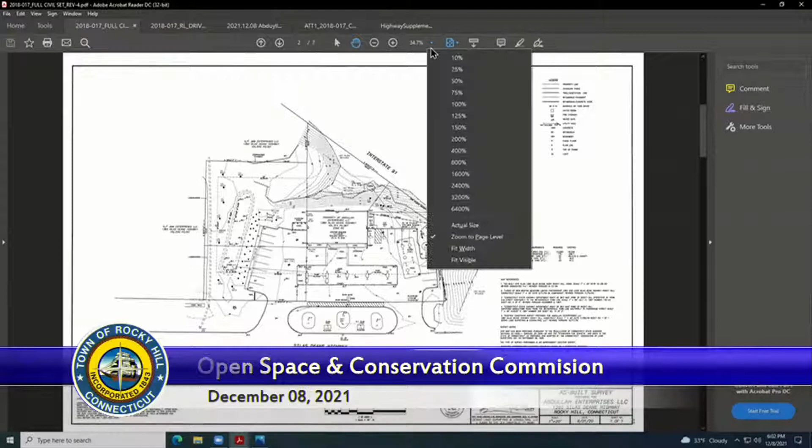Here's the existing conditions, how things currently are out there. You've got your filling station, which was recently renovated. This is the canopy, this is the convenience store. The underground tanks are right here.

As part of the prior project, we did some low impact development stormwater work in this area, so the drainage sheet flows off, goes through a vegetated strip, and goes to our detention-retention basin. On the south side of the property, the stormwater is handled by a stormwater treatment unit, and it is discharged to a plunge pool in the wetlands. You can see here there's a steep slope behind the building currently.

When I pull up the proposed plan, you'll see that the drive-through lane will enter here. We'll be relocating one parking space over to here. So the drive-through will enter here, we have a nice tight radius on it, functional but tight, that lets us bring the drive-through lane right against the building, and then we're able to exit through here.

When we get to the impacts and mitigation, one of the things you'll be seeing is this plunge pool is going to be restored back to wetlands and pulled back underneath the proposed drive-through lane. We're also going to be installing some additional stormwater management, we're calling it a stormwater quality wetlands. Let me just call up that proposed plan.

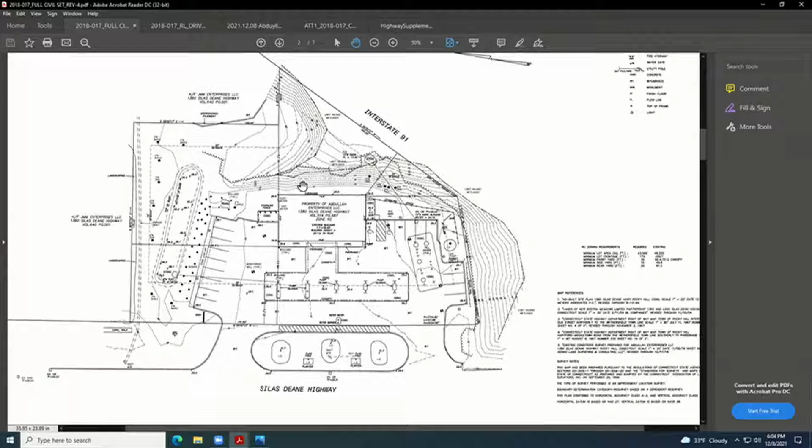Okay, so this is the proposed plan. Like I mentioned, this is where the drive-through enters. We're planning on making it a concrete surface, lighter colored, hopefully generate a little less heat into the wetlands. In order to create that drive-through lane, we're going to have a portion of retaining wall here. There was a comment last time about showing some sections through there, which we did, I'll show those in a little bit.

This portion of the drive-through lane will be underlain by some large culverts, in the dashed area here. The reason we're doing that, they're big open-ended culverts, the open ends face the wetlands, and that lets the water come in and out of them and lets us retain our flood storage, which we need to do.

As I mentioned, this is where we're installing that stormwater quality wetlands. We found that the soils over here are very tight, they do hold water. So our plan is to feed that stormwater quality wetlands from the existing detention basin, which is retaining the water a little longer than I like, and then that'll just keep that basin full. When it has excess water, it'll just sheet flow overland down to the wetlands. But that'll be a lot of stormwater treatment prior to going down into the wetlands.

There is a plan here. I'd like to go over, well, I'll mention because it'll come up in our discussion: we're proposing a fence all along our property line with Wendy's. We found that the prevailing winds apparently are in this direction, and a lot of the trash, et cetera, that ends up on the filling station property actually is coming over from the Wendy's, and we're hoping that that fence should catch that.

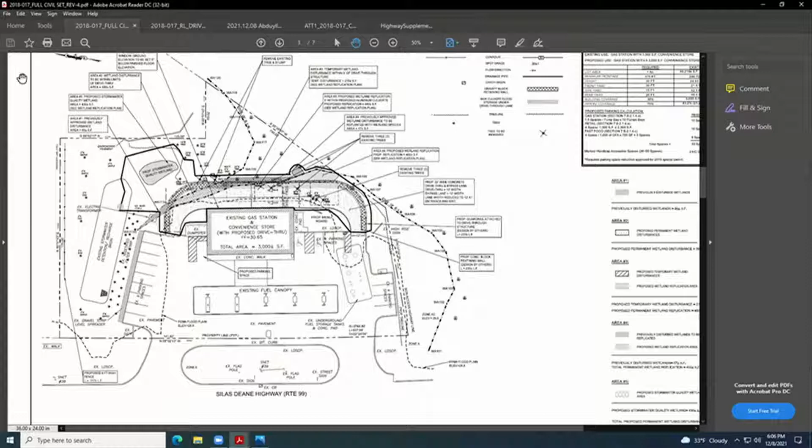Also, the drive-through lane itself is going to have a 6-foot-high fence, which also should prevent trash from getting off the site into the wetlands. So let me run through the impacts real quick. Should be on here... that's not it.

I thought it got uploaded. There it is. Okay, I'm sorry.

So I color-coded this just so it's a little easier to read. The X's here are 8 trees that will be removed, but if you look at the planting plan, you'll see we're proposing 16 new trees with a greater variety, all native, and we feel there should be an upgrade as far as the tree inventory goes on the property.

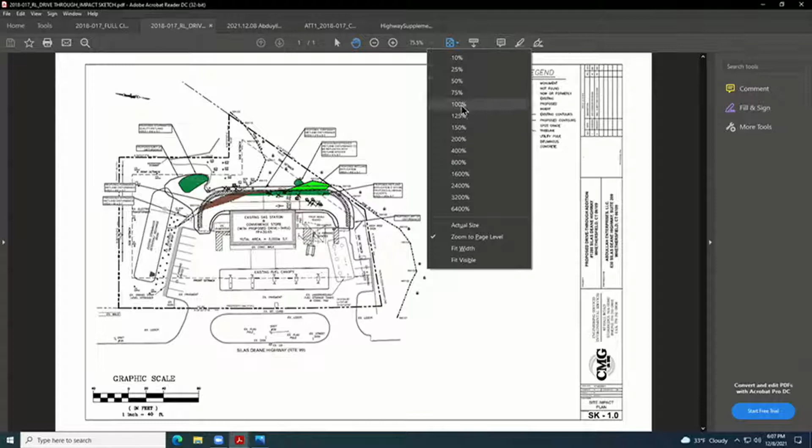So we end up with, let me blow this up just a little. Technology, okay. So impacts. The brown shaded area, that was a drainage swale, a ditch.

That's the permanent wetlands that'll be removed. Like I said, it was a drainage ditch, it's 390 square feet. Now we're proposing the light green, that's 400 square feet of mitigation. That's replicated wetlands, attached and adjacent, just an extension of the existing wetlands. In addition, we're also providing 430 square feet of what we're calling stormwater quality wetlands.

I know there was earlier discussion about whether it's really wetlands replication if it's not plugged into the groundwater. So we're already at 1-to-1. Obviously, if you did include that, which should function as wetlands, we're over 2-to-1.

Furthermore, we've got an additional 480 square feet, which once again we're considering an enhancement. I guess you could decide how you want to treat it as far as wetlands mitigation goes, but Kate can address it a little bit better than me. The open end of the culvert is going to have soil in it, and it'll get some light in there. So we wanted to point out that's another 480 square feet of enhancement.

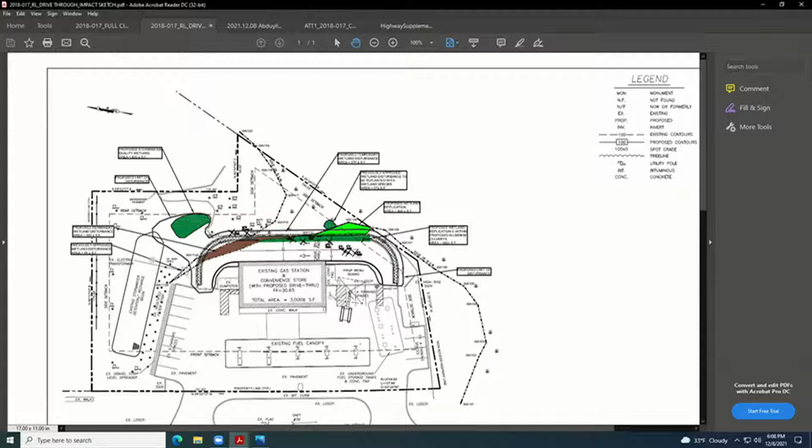Good evening again. So I have a printout of a write-up in a wetlands functions and values form that I can hand out to everybody, but I also see that it's on the computer so I can pull it up, so I can either sanitize and hand it out, or you can watch on the computer. Okay, the screen is fine. Everybody good with the screen? Fantastic, all right.

Just to kind of bring home the conversation we were having last time about what the functions and values are of this wetland, it's nice to put it into something that you can visually see. So what I have here is a letter dated December 8th. Let me see if I can make it smaller. And while my letter's nice, it really doesn't matter much. The fun part is this form here.

So the Highway Methodology Workbook has this form of value in there. Well, I'm not sure what that's about. Okay, make it a little bigger so we can read it. There we go. So on this form, what they've done, this document's been around for longer than I've been doing this work, and it's always utilized to determine what the wetland functions and values are of a site, and then we can kind of look at that as it relates to the project.

So with that being said, what you do is you go through and decide whether or not it's suitable to have these functions and values. So going through, groundwater recharge and discharge, yes, it does have that function and value. However, as you can see by the numbers, if you were to look through the report, there's the cover sheet, and right here is groundwater recharge and discharge. So with that being said, items 4, 7, 13, and 15 are what qualify.

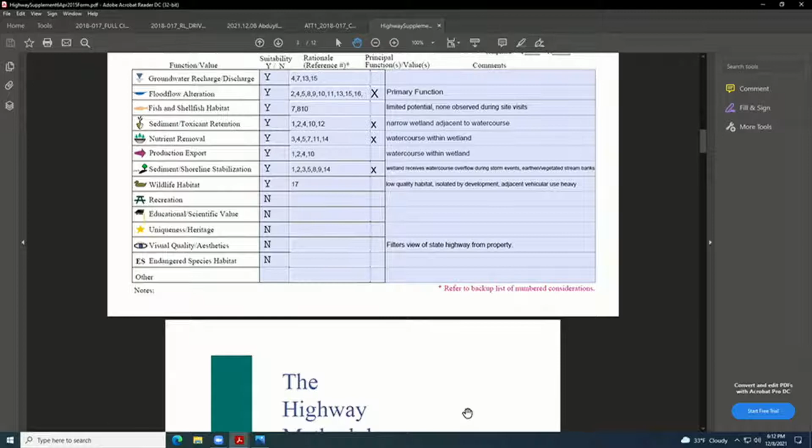So you guys can go ahead and flip through that on your own - are you able to flip while I'm on one screen? I can pass these out. Yeah, it's nice to be able to look. I'm not going to go through every one of them because I think you'd just get really bored, or some might get really bored.

But essentially, that's how you go about doing it. So when you look at flood flow alteration, it hits a lot of the points - hits the most points. That's the primary function of this wetland, according to this evaluation. So you guys can always go through and take a look at that.

The other one, fish and shellfish habitat - yes, there's probably a little guy in there, snails, of course, but you're not going to go in there and catch a big trout. This is not your place for a trout. There just might be somebody migrating by.

Sediment and toxicant retention - this, with having the wetland within it, is very important. And how the wetland kind of expands on the sides more towards where we're working, that gives it the ability to have time for attenuation of the nutrients and sediment as it runs through there. It gives that flood flow.

Nutrient removal - obviously a water course is going through there, taking nutrients out, also being utilized by vegetation. Production, export, same idea. Sediment and shoreline stabilization.

You have that buffer with the flood zone so that when you do have those heavier floodwaters, which can go through there, it can keep the shoreline stabilized. It has the room to move.

Wildlife habitat - there was a couple footprints in there, but I wouldn't qualify that as much of a function or value for this wetland.

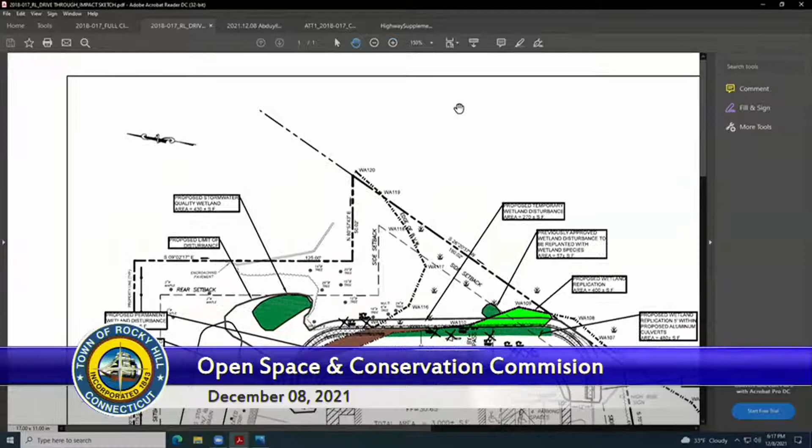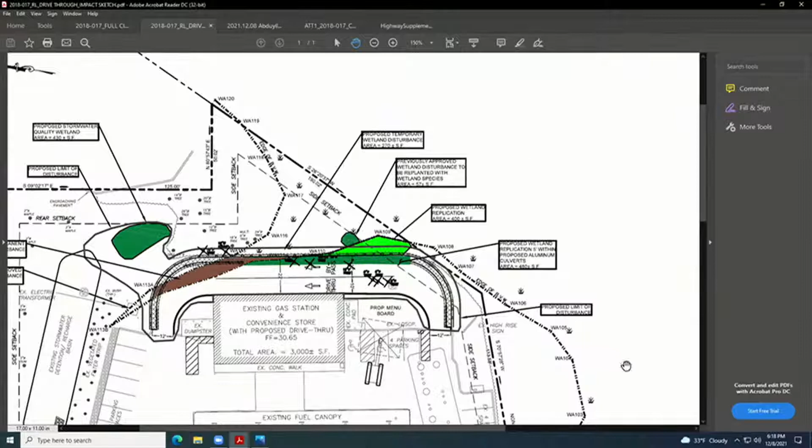So this light green is a true extension of the existing wetlands. The darker green here, that's the 480 square feet that's under the culverts, but will have hydric soils, so that's additional. And then we also have our stormwater quality wetlands, which is 430 square feet. So I guess it depends on how you define things. We were just trying to be clear, and a little conservative, by saying we've got 390 square feet here of permanent disturbance. It was this ditch that had some erosion - that's what's being disturbed. The 100% offset is a creation of this light green wetlands, along with another 480 square feet and another 430 square feet, which is over twice the permanent disturbance, that will perform some wetlands functions and enhance the existing wetlands. Thank you.

Probably hear me without that. Oh, she needs to record it.

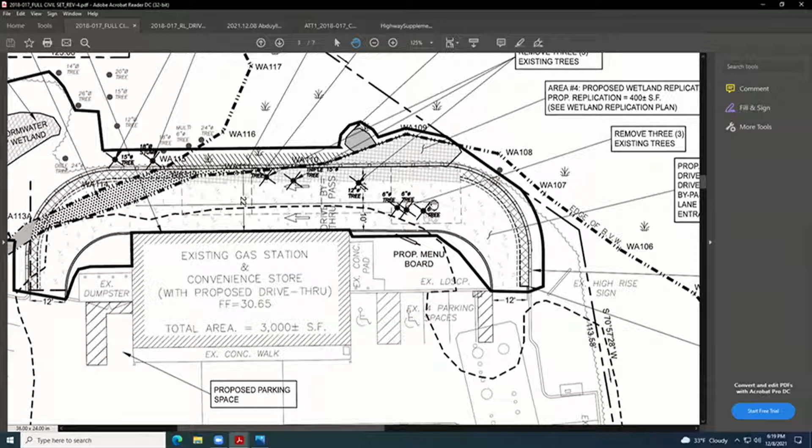I apologize, it's hard to see on this particular site plan just because of the X's where the trees are coming out behind the gas station. Can you tell me the caliper of those trees and about how high or mature they are? Let's see, if I zoom in like this we've got the data. So there was a 6-inch, a 6-inch, a 6-inch, a 12-inch, there was a 15-inch, and this one here, I'm not sure what that one was.

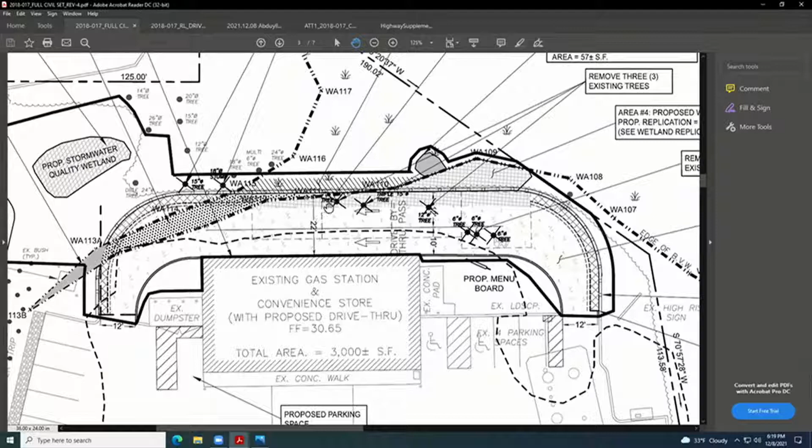That's okay, but they were not doing well. There was another 15-inch, and then this 18-inch is actually just a stump, but it was on our prior plan, so I wanted to note it and we also wanted to replace it. How high are some of these trees, or the highest? About 20 feet or so.

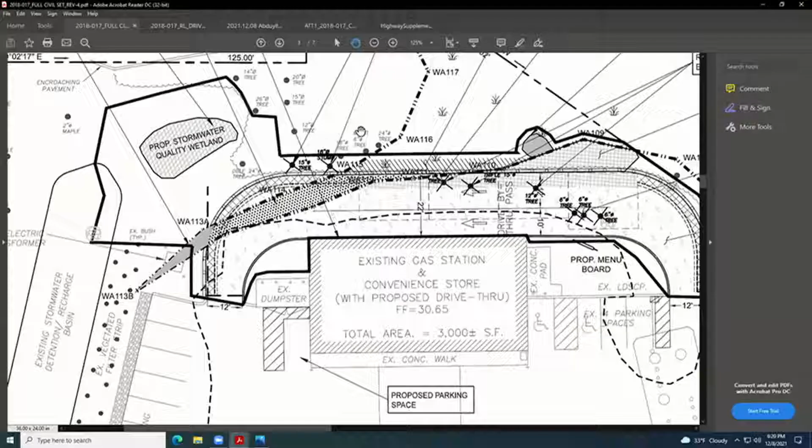This brings up what Kate was mentioning. We're trying to create as much replication as we can, and there were questions at the last meeting about going up into this area here. I'm going to pull up a plan from before - I didn't remember it when I was standing at the podium last time, but we had looked at that before. We didn't have all the trees on the plans at the time, and we were asked to check out the trees that were out there, and we did, and we found there's a double 24-inch tree here, there's a 26-inch tree here.

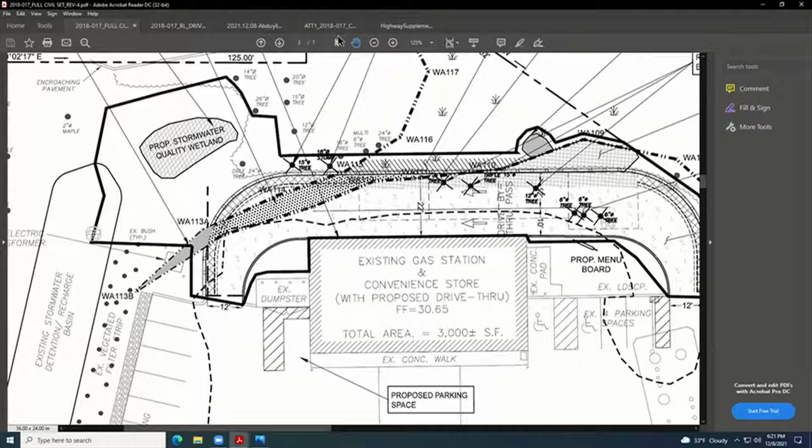So we found a 12-inch, a 15-inch, a 20-inch - there's all this existing vegetation here, and to try to climb up the hill to extend the wetlands in this direction would have just been counterproductive. We just didn't consider it feasible. Let me see if I can find it, I know I had that.

I guess my point is, what is the caliper and height of the trees that'll be planted to replace those? Obviously, maturity is going to be a different number, but hang on, let me shrink this down and get to the planting plan.

I can tell you the species, and unfortunately Terry Hahn, our landscape architect, couldn't be here today, but we do have it on our plan. So these are the trees that are going to be planted: 4 Homestead elm, 3 Indian summer crabapple, 3 sassafras, 3 red elm, and 3 white oak. They'll all go in at between 2 and 2.5-inch caliper, and obviously at maturity those are some large trees.

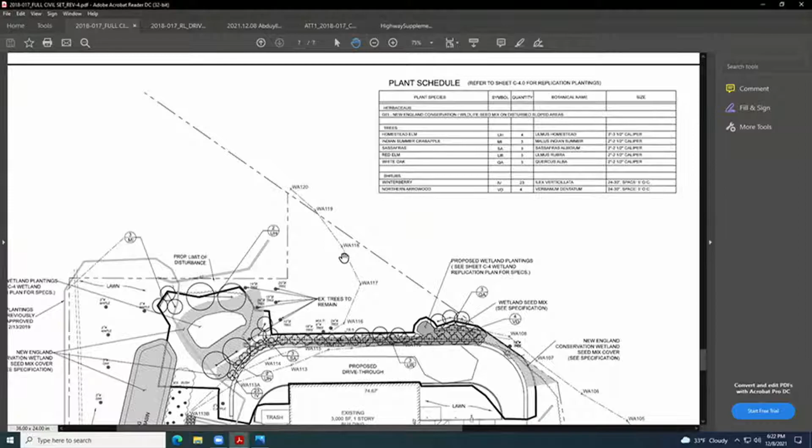So how many years would it take them to reach the maturity of the trees behind the gas station? Not being an expert, I don't know. 20 years? It depends. The hardwoods would grow slower than the softwoods, obviously. So putting them in at 2 to 2.5 inch, assuming a 20-foot tree might be an 8-inch caliper tree, you're looking at maybe 10 years, give or take.

So you noted in the memo that you didn't observe any wildlife in the wetlands when you were there. Did you see any in the trees? Well, avian species, yes, they were always calling. I mean, there was a muskrat track down there, and a frog jumped, a green frog for sure.

Are there any animals currently using these replacement detention ponds that were put in as part of the last project? I haven't looked to see. I'm sure there's frogs and avian species in there. I don't know, I doubt a turtle's crawled up that far, but maybe, because the soils are very sandy, it might have been desirable. But I hadn't gone through to take a look.

I do estimate that there will be some critters that will like the cover of these culverts underneath, they'll be perfect for them. But to set up a home base down here because of the flooding potential, if it was me, I wouldn't put my home there. So I think some of these more long-term residents for wildlife are going to be at higher elevations, just coming down for water and feeding.

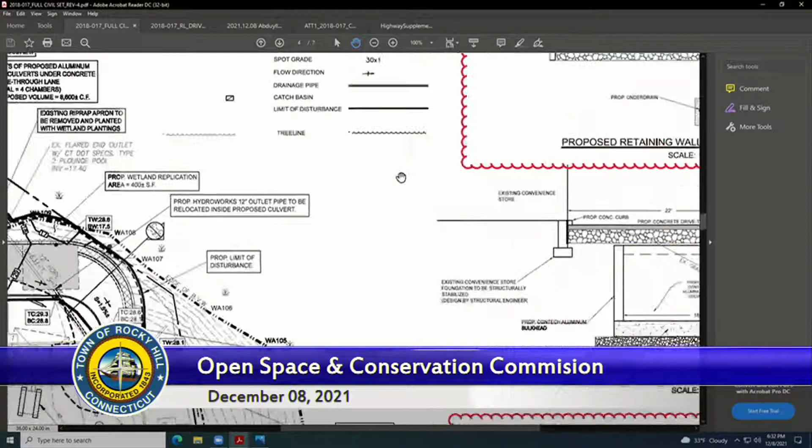The other was a request to add some additional sections. So we added a section here through this retaining wall area, and a section here through this retaining wall area, and they're right here. By the way, I have 7 copies of these plans, and the revisions we made are ballooned so you can see what they are. I can pass those out so you have them.

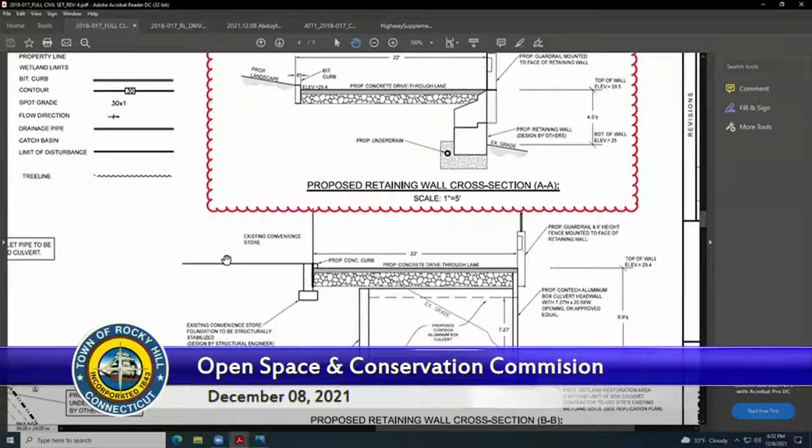And then on the demolition plan, if I can find where that is - we decided not to change that 27 contour, and the landscape architect wanted us to put a prominent symbol here for tree protection, so we added the symbols for tree protection. So those were the only changes: reduced the grading, added additional tree protection, and added the 2 sections that were requested.

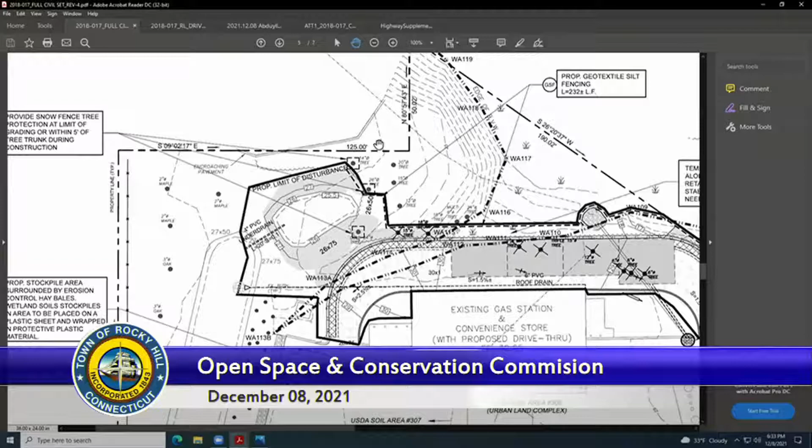Okay, I'll need to see those before I have any questions. Can you get him the copies? It wouldn't be tonight anyway. Okay, it's understandable. So these have a revision date, and changes were noted. Okay, thank you.

And Commissioner Whelan, do you have any questions? I do not. All right, I have no questions either.

All right, so at this point I'm looking for a motion to close the public hearing. Actually, wait, sorry, I just had one other thing - sure, it's just more of a handout, and I've already distributed it.

What it is, I went back to the regulations just so I could put down - because I know we talk about things in different orders and get questions - so I figured I would put down what our intent was, relative to the regulations. Basically it's a summary of what we were trying to accomplish. We read the regulations, looked at the criteria you're charged with considering, and tried to bullet point out what we feel we've incorporated into the plan to satisfy those requirements. I thought it'd be good to give it to you for your deliberation, so you could have it all in one place, handy.